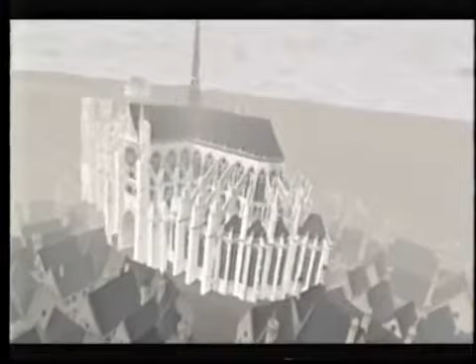It is through the myth of Daedalus that we are able to fly like gods or goddesses. We can comprehend the entirety of the cathedral, the cruciform shape of the transept, the flying buttresses, the central spire.

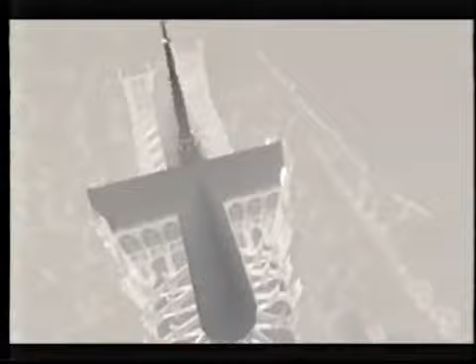With Daedalus we fly, with Icarus we fall. Through the nave roof and vaults,

and at our feet we see on the nave floor the labyrinth, known in the Middle Ages as the House of Daedalus.

At the center of the labyrinth, the octagonal plaque celebrates the creativity of the 3 architects and the founding bishop. From this plaque, we take the first master mason, Robert of Luzarches.

And as we listen to the music of Perotin, composed as the cathedral was being built, Robert will demonstrate for us his method of design.

The cathedral is built in the measure of man and of heaven. It is laid out using the Roman foot of 29.5 centimeters. As Robert walks, he leaves behind him a trail of foot units.

The feet are gathered into 10-foot squares, which are themselves gathered into a great central square of 50 feet. Noah's Ark was 50 cubits, the cathedral 50 feet. They are both vehicles of salvation.

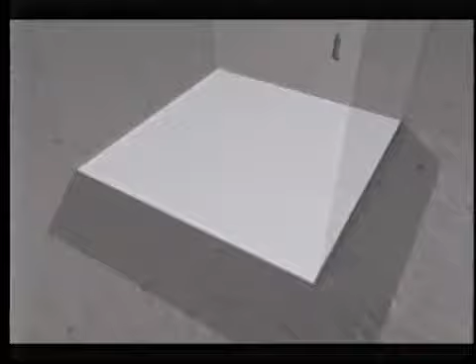The square turns into a space matrix, and the 4 crossing piers are located. The span of the aisle is created by means of a golden section.

The square is halved, the diagonal of the half square is rotated, giving us a 5-to-3 relationship, 50 to 30 feet. The image turns gold to indicate the golden section.

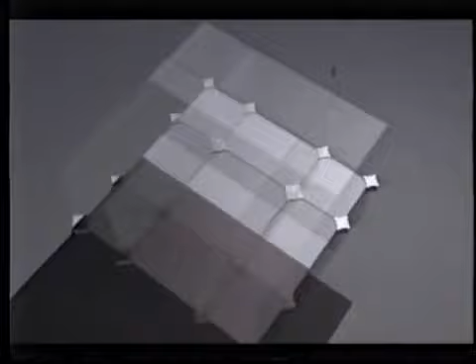The central 50-foot square is surrounded by a peripheral space of 30 feet, creating a double square. This is the image of heaven that we saw at the beginning. Heaven is encoded in the central space of the cathedral.

The spaces of the cathedral are unfolded outward from the great central square using dynamic geometry. First come the transept arms, rotating outwards like windscreen wipers.

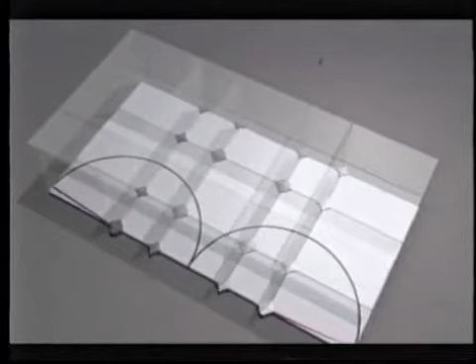Next, the diagonal of the great square swings to give the length of the nave, creating a square root of 2 rectangle.

The half diagonal gives the length of the choir, creating the great cruciform shape. The same strategy gives the choir aisles.

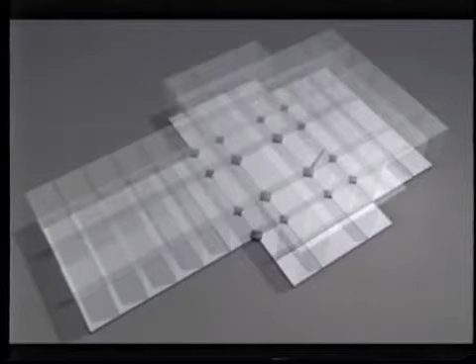The center point of the hemicycle is located slightly to the east of the last division. We find this point using the diagonal of the choir, and from this center is struck the hemicycle and radiating chapels.

The bay divisions are inserted, and the height of the edifice is found through the rotation upwards of the great central square.

The cathedral is built ad quadratum. The resultant space matrix has a kind of Platonic clarity and beauty.

This was the vision of the cathedral entertained by Robert of Luzarches and the clergy at the start of work in 1220.

However, 50 years of construction, of push and shove, separated the vision from its final realization. We will now watch the cathedral going up.

Work began along the southern flank of the nave with the west facade. The north nave aisle follows a little later.

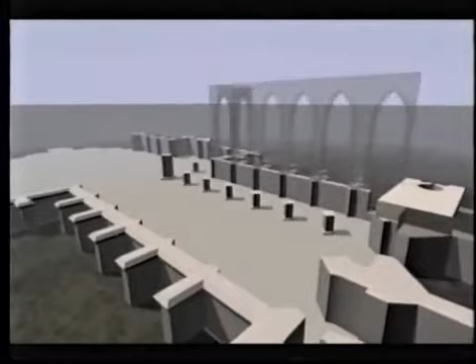Robert of Luzarches was probably asked by the clergy to create a provisional liturgical space that would serve for the immediate celebration of the offices.

In this way, the south nave aisle and the south transept aisle were finished in the first 5 years of work.

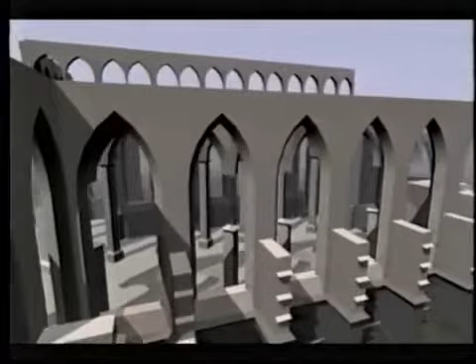With the north nave aisle completed soon afterwards, probably around 1230, Robert of Luzarches died and was succeeded by his former collaborator, Thomas of Cormont.

In the 1230s and 1240s, Master Thomas constructed the upper nave, simultaneously laying out the lower choir. Bells were hanging in the southwest tower by 1243.

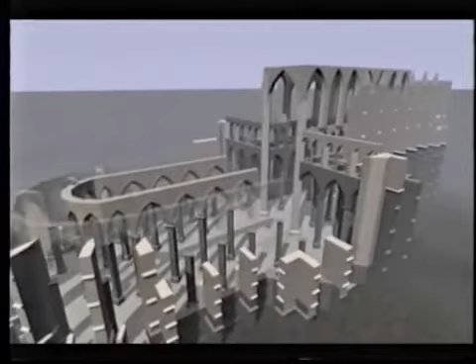Thomas of Cormont died in the later 1240s with the upper nave complete. He was succeeded by his son, Renaud of Cormont, who in the 1250s and 1260s constructed the upper transept and choir.

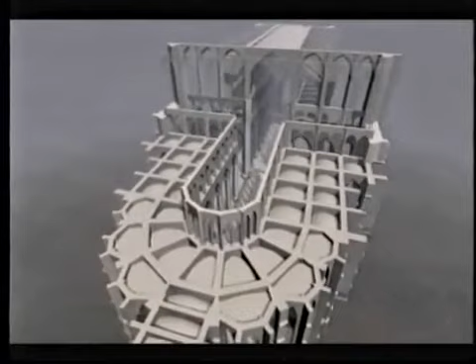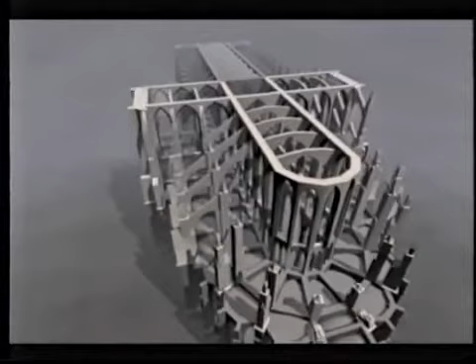Renaud changed his father's forms, introducing a different type of triforium and a different flying buttress. The choir flyers are placed too high and are too light to be effective.

Renaud thus becomes a type of Icarus, a disobedient son, destabilizing the authority of his father's structural system. The upper choir was finished towards 1269.

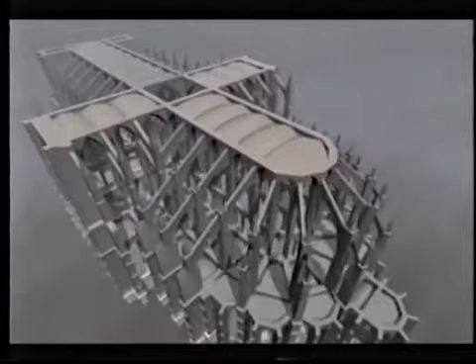The flying buttresses built by Renaud of Cormont are ineffective. They are placed too high in relation to the main vaults. In the late Middle Ages, the main supports buckled.

The flyers were dislocated. The cathedral was saved through the insertion of an additional flyer placed underneath the original support.

We enter the model in order to explore its spatial complexity. The model becomes a linear matrix, echoing the linear intensity of Gothic. We move down the south nave aisle into the crossing space, sensing the diagonal expansiveness of the crossing area.

We enter the double aisle of the choir and circumnavigate the ambulatory, leaving the radiating chapels to our right. We return along the choir north aisle, back through the crossing space, into the nave.

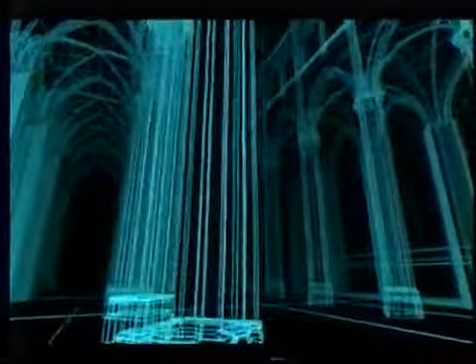Entering the nave main vessel and looking upward, we sense that the building is made of squares. The aisle vaults are perfectly square, the nave vaults are double squares. We approach the great central square into the crossing space.

The crossing piers are slender and are pushed inwards by arcade walls meeting at 90 degrees. The piers buckle and would have collapsed. The collapse was averted in the late Middle Ages through the addition of a massive iron chain that pegs the piers in place.

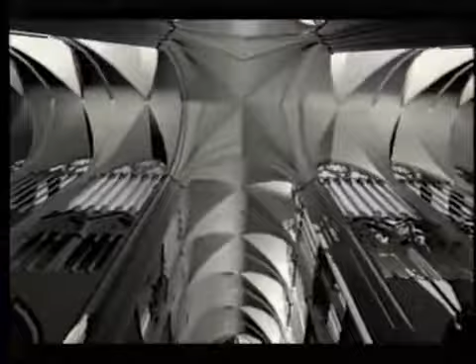With an anagogical upward lifting conclusion, we end where we began, in the heavens.

20 years ago, we started talking about developing a video program on the basis of art humanities. The idea was that there was an audience out there waiting for it. Just as we would put together a course, we would be able to send our best instructors, as it were, over the networks, through the wires and so forth.

That has now developed, I think, much more actively, much more dynamically into what we're doing now. It becomes increasingly possible to make much more articulate the experience of architecture, both in terms of the viewer as spectator, as moving spectator through space, but also in terms of the analysis of construction.

Intellectually, it will be a means, I hope, that a department that prides itself on being one of the best, or perhaps the very best, art history departments in the United States can begin to project itself into a much wider community. It's one thing to deal with a picture, which is a two-dimensional surface, using images projected on a wall. A building does not respond so readily to that kind of image.